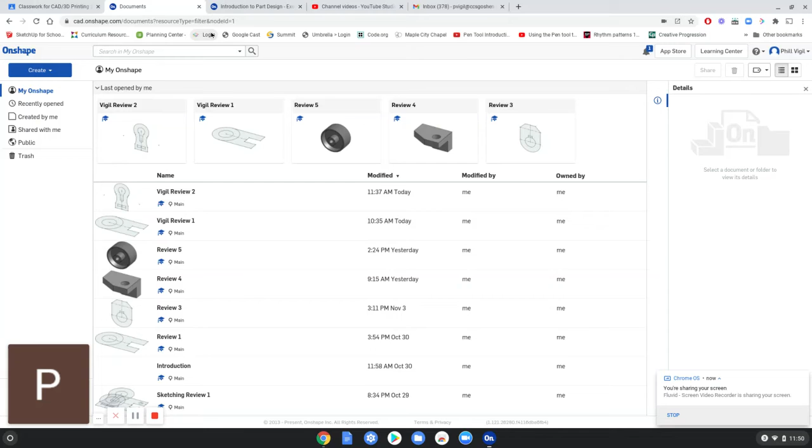All right, we're going to start our review 3. So we're going to be making this part shape here.

So the next step is getting started: create a new document, and make sure that the workspace length unit is set to inches. Then begin a sketch on the front plane.

All right, so we're going to go to our documents, create document. Whoops, I didn't save it. This is review 3.

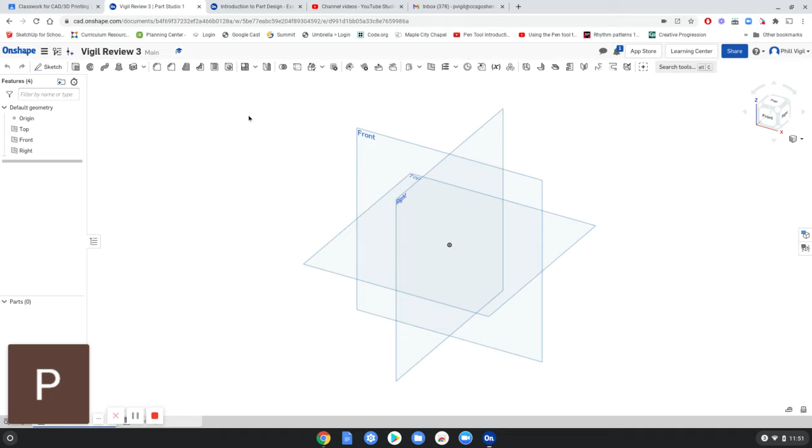And we want to go to the front plane. So I'm going to click that and then start a sketch. Now, to make sure that this was set to inches, I'm going to view normal sketch plane and then press the P key to get rid of that.

So I'm going to check the document menu and go to workspace units. And this is set to millimeter. So I want to make sure that this is set to feet, I think. Inches. All right, so each unit should be an inch. So we're going to click the check mark to accept that change.

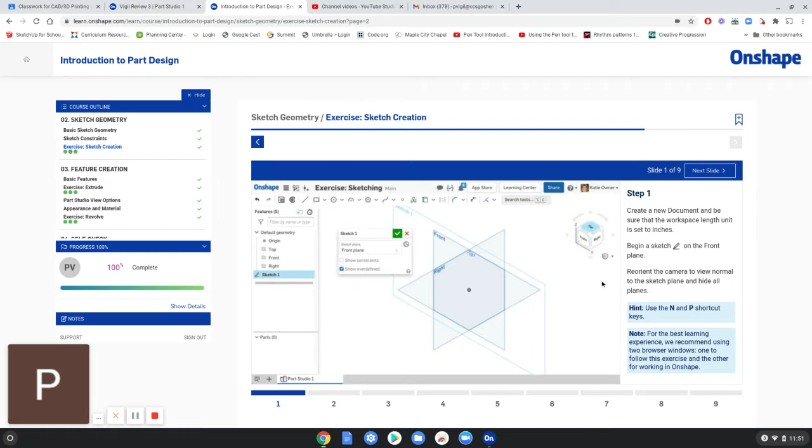And then we're going to get started with the drawing. So we're going to sketch a corner rectangle as shown, and then be sure the origin is located at the midpoint of the bottom line.

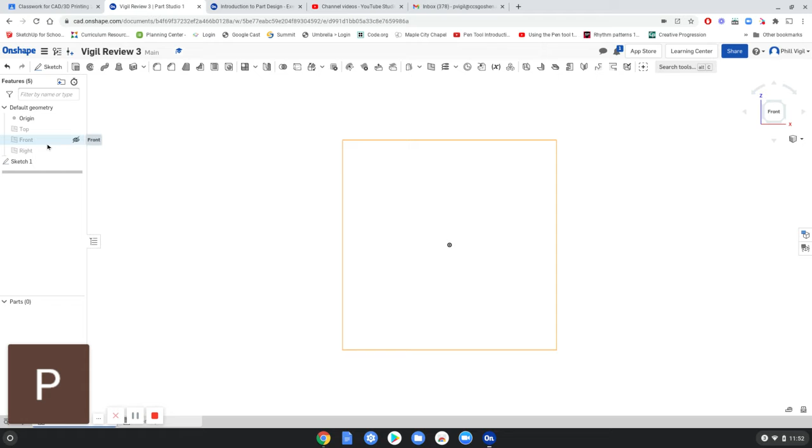So we're going to go ahead and start by drawing a rectangle. We need to get inside our sketch here and click on the rectangle tool. I'm going to sketch a rectangle. I need the midpoint to be at the point of origin. I don't have that option, so I'm just going to draw a rectangle.

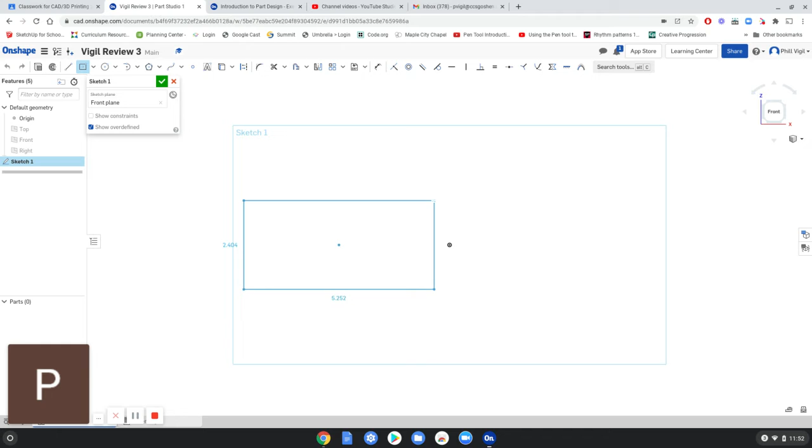Let's see about that shape. So mine was set to center rectangle. I'm going to escape out of that and go back to corner rectangle. And it's about like this.

Let's say that's good. So now I want to make sure that the midpoint lines up with the point of origin. So I'm going to use this midpoint. Oh wait, no, that snaps to the midpoint. Yes, that's what I want. So point of origin to the midpoint of this line. There we go.

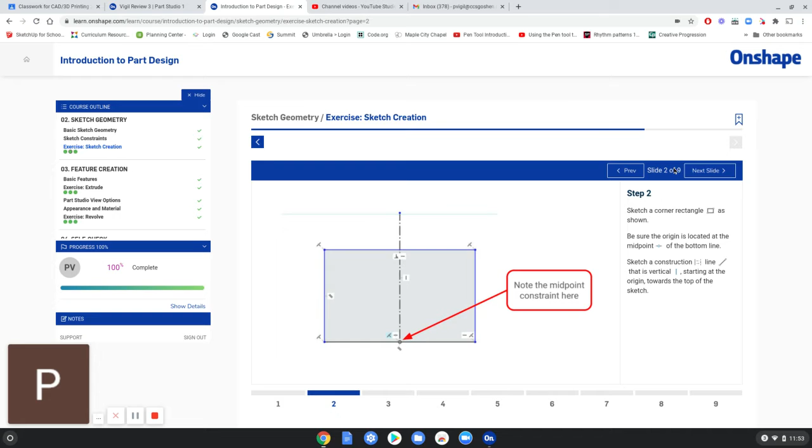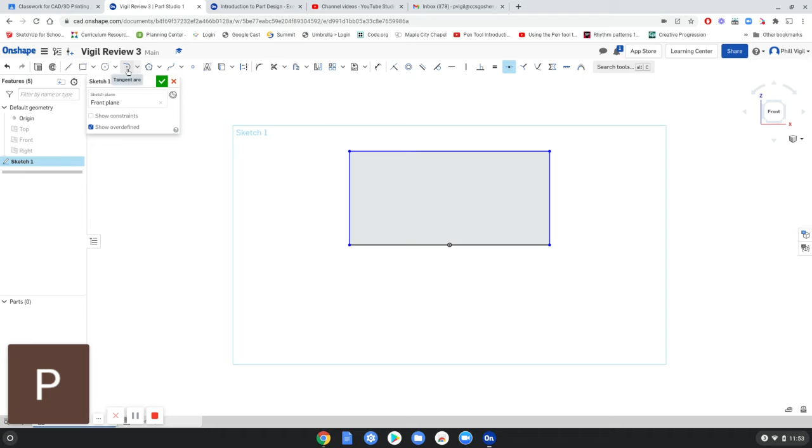So let's do the arc first. Since I need both sides to be tangent, let's just go ahead and do a 3-point arc. So click on one point, whoops. Click on the other point, and it's going to be downward this way.

I want these two to be tangent. So I'm going to use this tangent tool. Click this, the arc, and then the line, and then click on the arc and the other line. So I'm going to show constraints just to show that both lines are tangent to the arc.

So we've got the rectangle, and then we need this angled line and then a straight line across. There's a midpoint constraint to this line. So let's do this line first at the top.

So I need a line somewhere around up here. Then I need a construction line, looks like, from this center point up there. So I'm going to draw this one perfectly vertical first.

So line, and then you can type the Q key to get into construction mode. Make sure this is perfectly vertical. I'm not going to intersect because that will add a constraint that I don't want to use. So I'm just going to click a little bit below that.

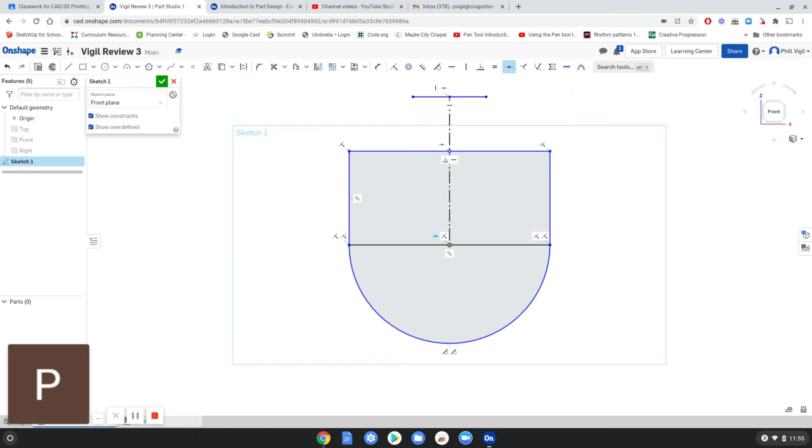Now I'm going to make sure that the midpoint of this line is snapped here, using the midpoint. There we go. Now we've got two angled lines that go down and meet here. So we're going to go to the line tool.

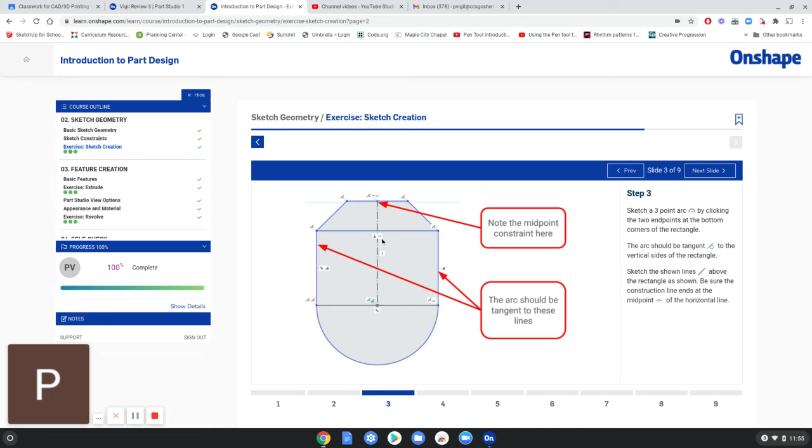All right, let's see what we got. Looking very similar. Just checking all the different constraints. Looks good. All right.

Circle. And then I want to select those two lines. So I need to get out of the circle tool. So just press escape. Select these two lines here, and then toggle them to be construction. And click anywhere to deselect.

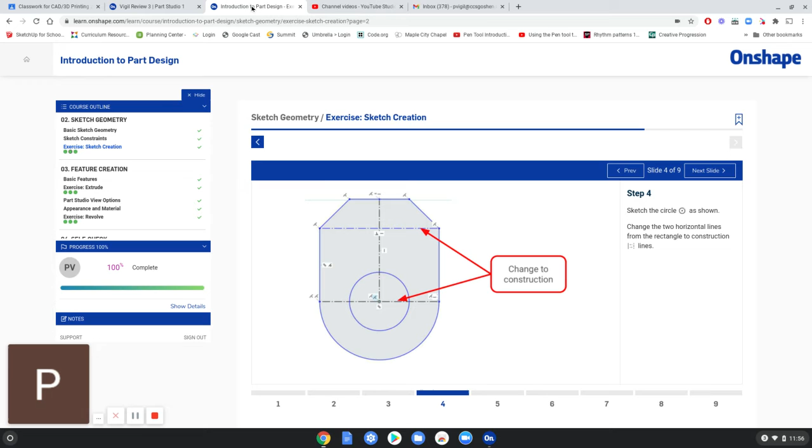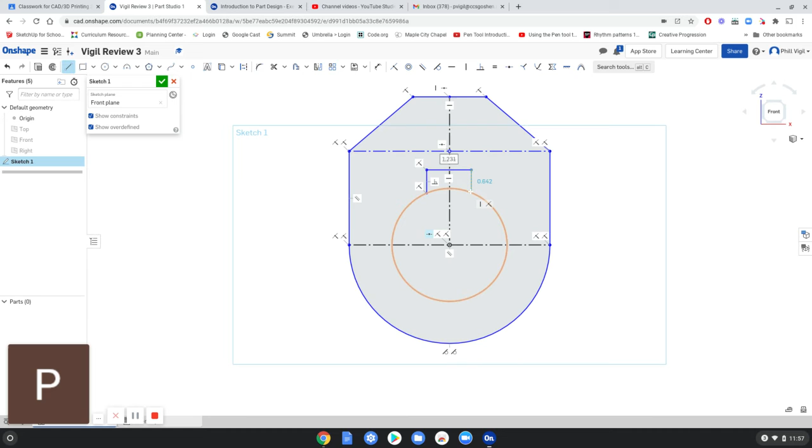So at the top, somewhere along this circle, I'm going to click to attach and go up, vertical, over, horizontal, and then down and meet the circle again. Escape to get out of the line command. So now these two lines need to be equal to each other. So I'm going to click on this equal constraint, and then click on both of these lines.

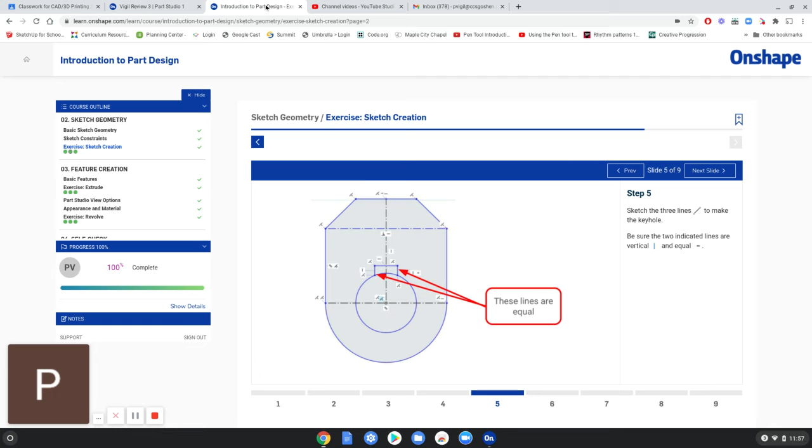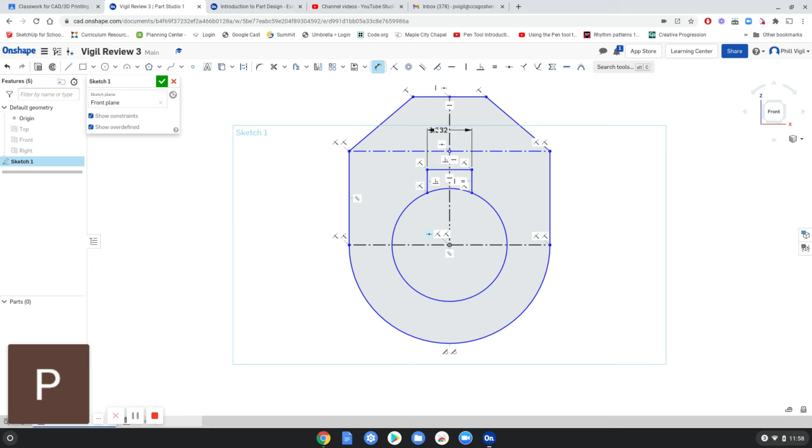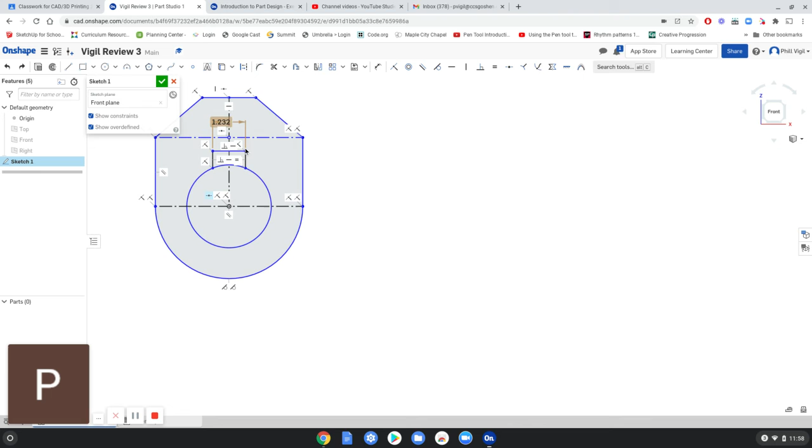What just happened? Let's move in here. Let's not do that one first. So my sketch is a lot smaller than, oh, that was 0.75, not 75. That's very important.

So we've got this measure tool, dimensions, where we go? 0.75, the decimal is very important there. All right, now 2.5 and 3.5.

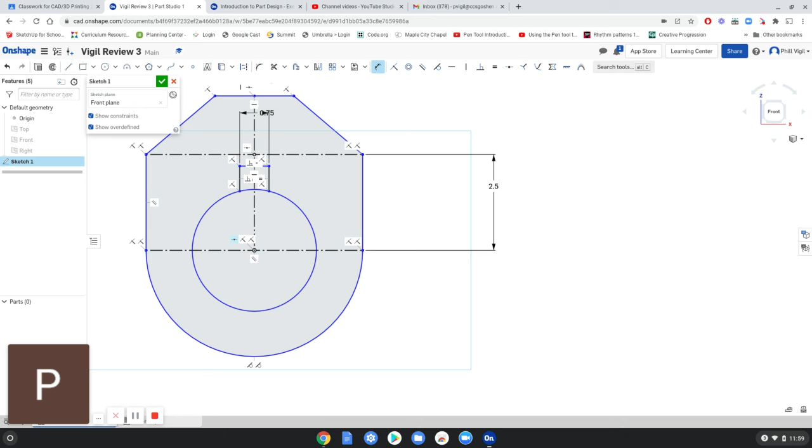So 2.5 is this single line. And then from here to here is 3.5, I believe. Nope, from there to the top is 3.5. So from here to here, 3.5.

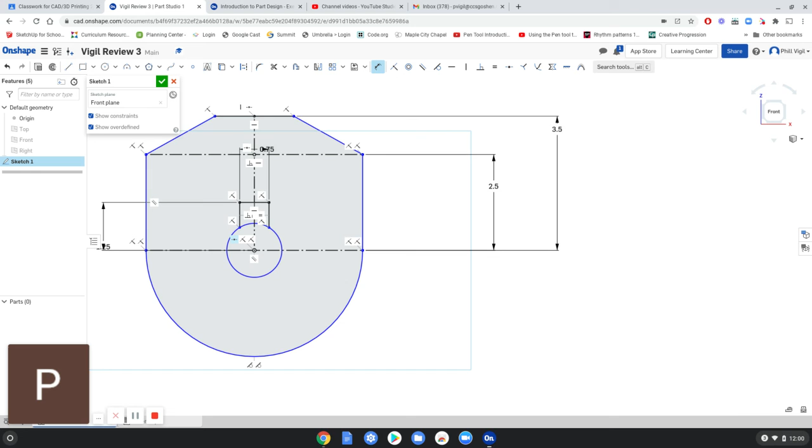Then we've got 1.25 from there to the center. So again, from here to the center, 1.25, enter. That does not look right.

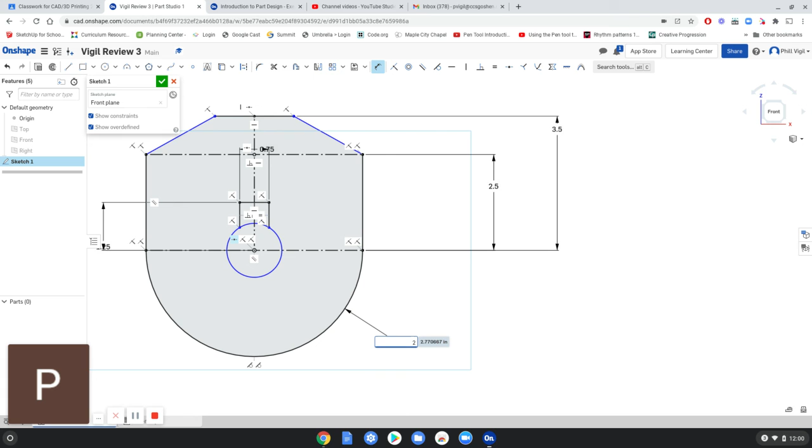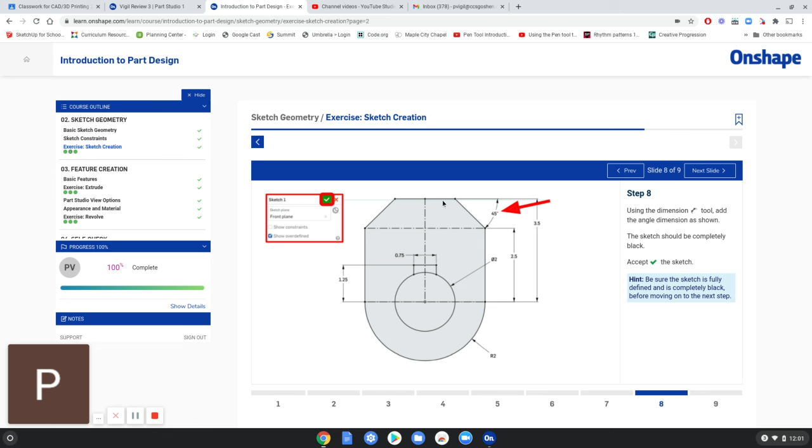All right, it's starting to look a lot more like this. So this next part, there's a radius. Actually, it's just an angle measurement. And that's going to set the length between here and here, which will also adjust the length of this top line. So that has to be 45.

So to get this measurement, this was a little bit more tricky. So I'm actually clicking this line here, the angled line, and I'm getting the reference of this line here. So it's still not giving me the... Oh, I have to click on it. There we go. So we want this angle measurement degrees to be 45.

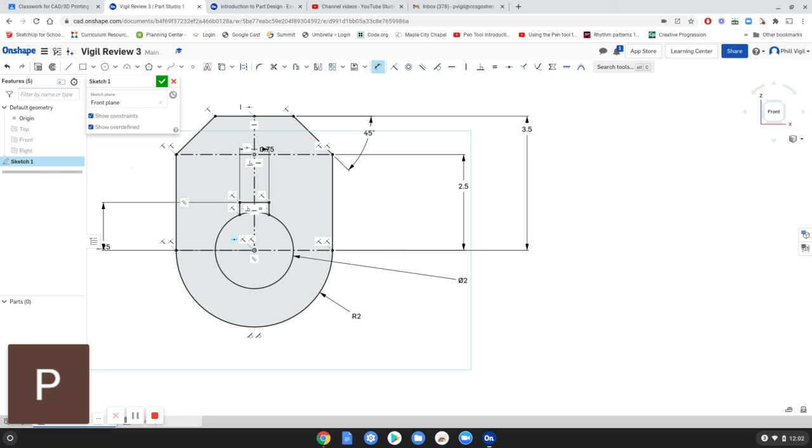Now everything is black instead of blue lines, meaning this entire sketch is locked into place. And that should be the conclusion.